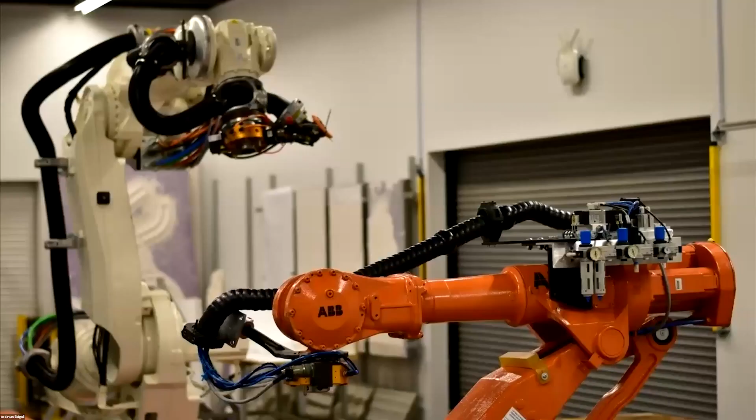Now you can do that, okay. I think you can just have a basic look. As you can see, it's going to do the pick and start cutting. So first cut.

Here is the problem. The second cut is kind of a problem, and it's the edges cut from both sides, and like with the last one, it actually goes from up to down rather than down to up.

Okay, so which one was the problem? Okay, so the last cut is that just the cut it off. So the problem is here.

Let me show you. Okay, this one, it's actually from this point, cutting this side. But actually, I think instead of cutting this face, the surface is just cutting through the middle, and it's this one, this arrow.

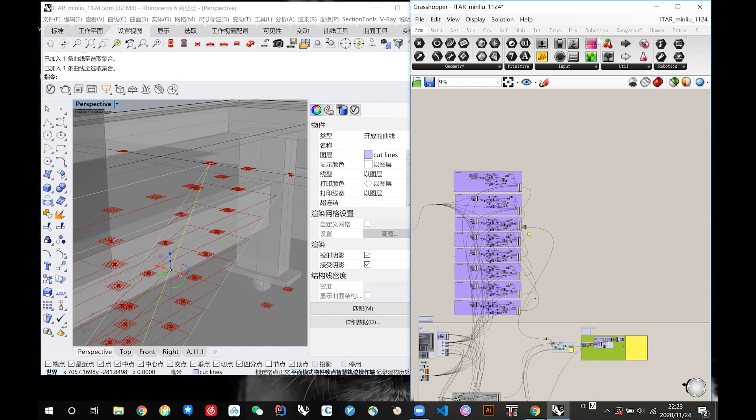Okay, I think so, there's some issue. Wait a second, I need to clarify which side is cutting. Are you talking about cutting this section that I'm drawing right now?

I'll do it second, it shows up. Do you see it? Yes. Okay, interesting, because it doesn't show it on my computer. Oh really? But I can see it. Okay, good.

So it's that side. Okay, I think it's more clear now. Can you see the green part? Yes. Okay, so what was the problem there? Why isn't it cutting it?

No, it's cutting from the middle. Actually, instead of starting from here, it's starting from here. You mean this? No, no.

Remember this surface, and as you can see, it's cutting from this. My suggestion is this: actually just minimize your Grasshopper and then open two views of Rhino so I can see both of them at the same time.

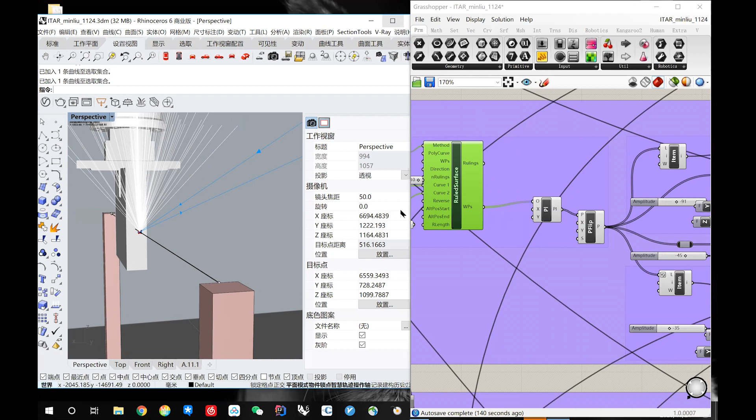Okay, as you can see, it's actually should be cutting this surface, this one. But instead, this kind of surface has some kind of angles, and it's just cutting immediately from the middle, as you can see.

Okay, I think it's just the rotation. So basically you mean that it should be rotated like 90 degrees or something like that? Yeah, as you like. I think it should be some 90 degree.

Can you zoom in on the targets? Wait, I think I can. Yep, there. Because it's Grasshopper, you can. Okay, good, there.

A little bit further. Okay, so do you see what's happening here? Just click somewhere else. Click somewhere else, because, uh-huh, first of all, you have duplicated targets. Why do you have two targets at the same time here?

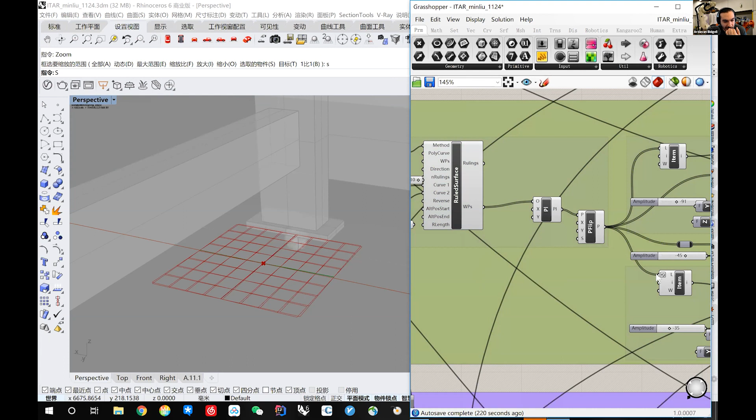Because these two targets are not aligned, because I'm trying to do the rotating. So hide the things that you don't need, so we can actually visualize which parts are the actual targets that you are cutting, this one. Okay, so whatever you don't need, just hide it.

Okay, I already hid it, so there is only one target. Okay, so right now you see that this is the X, this is the Y, and the Z is actually facing down. Yeah, that's not good.

So something is fishy here. Can you zoom out so I can see the targets on its left? Just a little bit, zoom out. Oh, not that much, I'm sorry. So this one?

Actually, yeah, good. So here you see that these targets on this side, this is X, this is Y. And if you use the right-hand rule, Z is up here.

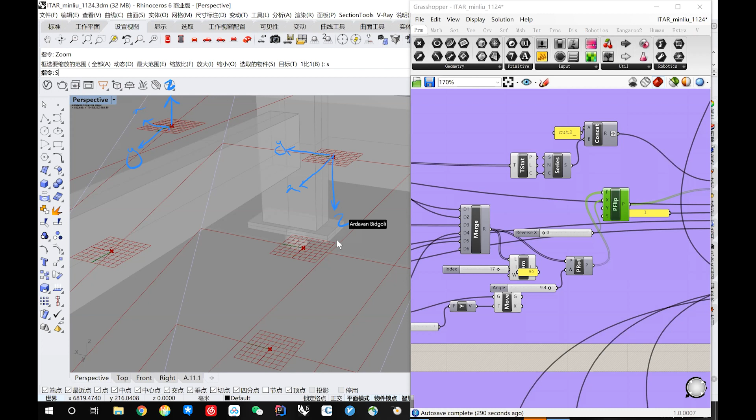Okay, but here you see that Z is here, X, Y, actually X is here, Y is here, and Z is here. So you can see that your targets are actually not only upside down, but they are also 90 degrees rotated. That's why your robot is doing the wrong job. You need to flip these targets.

Yeah, I flip it. Okay, so the flipped one is right now hidden, so we see something else. So actually you should unhide, preview that one, and hide everything before it, so I can make sure everything is correct.

Think... okay. Oops, yeah this one. Okay now let's see what do we have. So we still have two things here. I think there's one better solution.

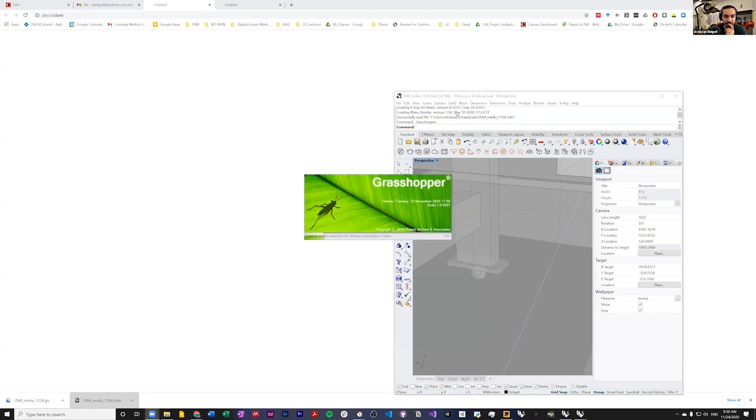Okay, so these are the targets. And I can safely assume that this is the place that you are working on.

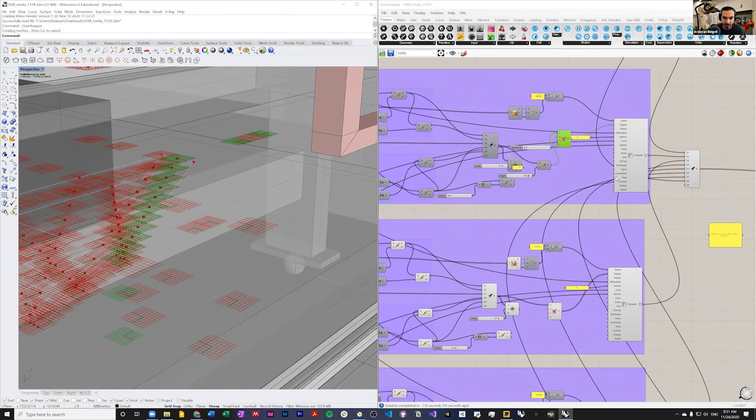So let's see what else do we have over there. So you see that there are two sets of targets here and they're all rotated on top of each other. So there might be some other files.

Okay, so this is the one that you use as your target. And this is, let me see - okay, so this is X, this is Y, and this is Z. It seems this one is legit, no problem.

So let's see what else do we have here. We have a bunch of targets here. I want to compare them together and see what's your tool definition. So here, if you have no problem with these cuts, probably you should not have any problem with these ones either, because they are only a 180-degree rotation of each other.

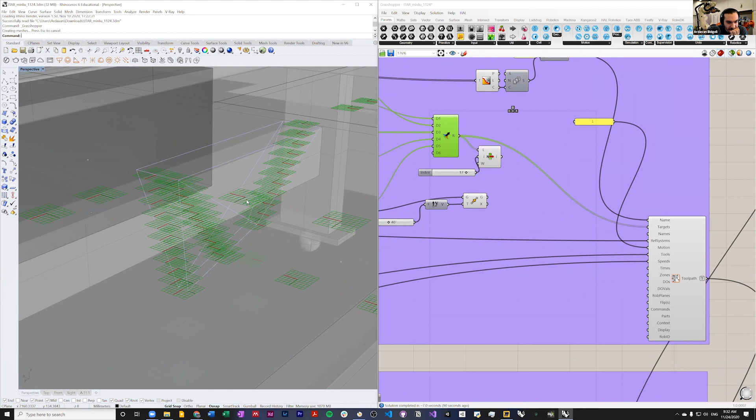And then let's see what else do you have here - all the targets here. Okay, so you have a bunch of targets that are each in different situations. Yet they are all in good shape, and for some reason...

Okay, so let's see what's wrong here. I'm going to play with these two cards here, this one and this one. So let's detach them from this group.

So we can play with these two. Let's see which part of this whole toolpath is the problem you have. I think it was one, am I correct? Let's see. I'm going to keep this perspective view as well as this side view, and see what's going on here and what's going on here.

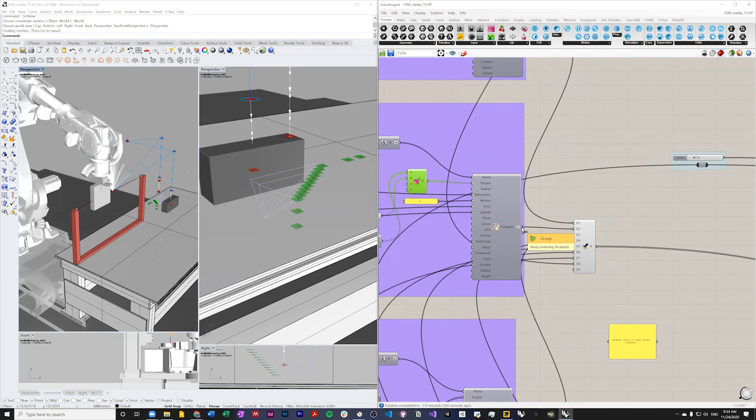I'm going to hide everything else that we don't need here. The only one that we need is this one. Let's assume that this is a toolpath that we need to work with, and the number of targets we have is not 120, so let's keep it around 25 so we can easily manage everything.

Now let's see what does this robot do? The robot is basically turning everything 90-degree rotated, while we have these targets that should not be like this. Now let's check with some other toolpaths that you may have here, like this one.

Okay, let's see what will happen with these ones. Strategically located there. Huh, doesn't work with that one. Oh sorry, my bad, it should actually be like this.

So for this one we have the same issue, it's also cutting this from this side. So this is also... oh, but for this one, got it.

So I think this is the same cut, am I correct? Do you want to cut these steps that you see in green in the same way that you cut those other ones, or not?

Yes, the same way. So if you have any problem with that one, this one is also challenging. First of all, is this a geometry, or is it just like, okay, this is the surface that you're trying to cut.

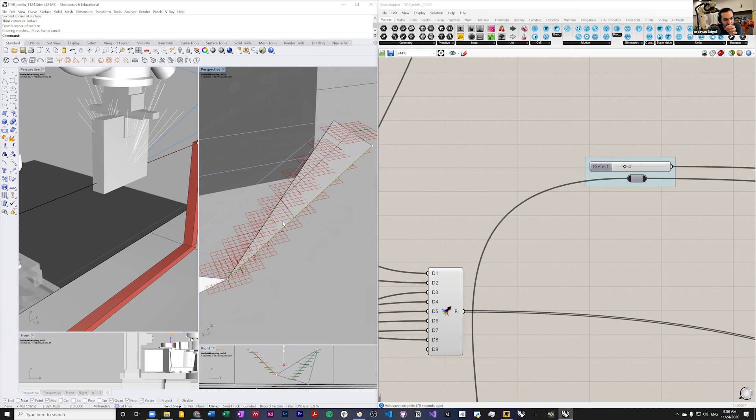For this one, you need to have a different angle, which is perpendicular to the whole thing. I think the only thing you need to do is to actually rotate your targets around its plane. So have you rotated anything?

Yes, this is the one that you need to rotate, and you're not using degrees. That's one of the problems. And keep this one as 90 and minus 90 as the limits.

And maybe it should be the correct number. And then you rotate it for 90. And that's it.

Now when you cut, you see that it's doing the cut that you want. You just need to do the same thing for the rest of it. Is that clear? So the only thing you needed to do is to actually rotate it for a correct amount.

So I'm going to delete whatever you don't need here. Yeah, that was the problem.

And remember, this rotation value must be an angle in degrees, not radians. By default it's radians, so a 90-degree rotation in radians is pi divided by 2, which is going to be a really crazy number, 3.1415 something divided by 2. But if you convert that into angle degrees, then it's going to be an integer number, 90.

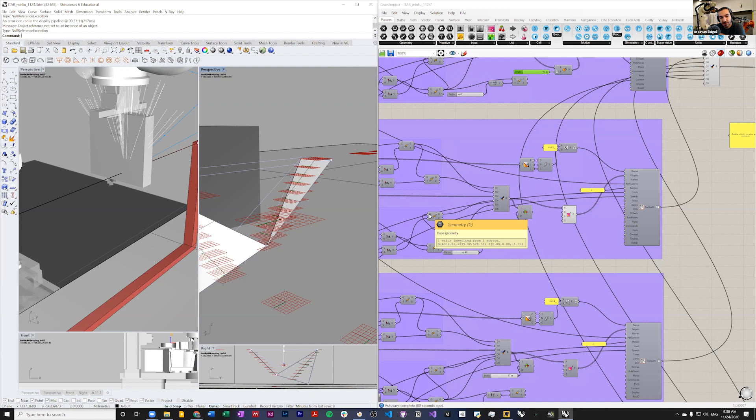The other thing you can actually work on to clarify this whole workflow for yourself is to let the robot hold the actual geometry instead of this block here. So where did you define your work object tool?

Let me see, in the beginning you can just zoom smaller for the grasshopper. Is this no? I actually want the one where you have the work frame. Okay, so wait a second.

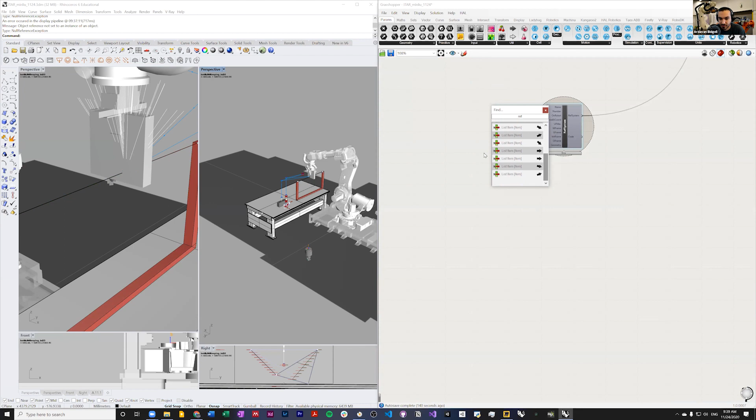Oh, is it here? It's on the... is this one?

My suggestion is to actually, instead of just using that geometry or form, do you have the original geometry of this one somewhere in your file? Where's that, in the layer? I think you should turn off the layers, and in layers, cut elements.

Oh yeah, it's here. Okay, so I'm going to do some extra stuff here. I'm going to bake this one. Oh, I don't need that part. Yeah, I need that part. And then I'm going to scale this thing from here to somewhere maybe here, and then group it.

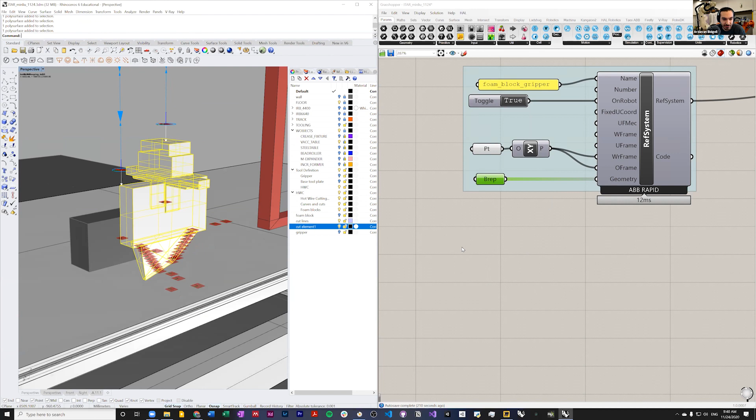Is this everything? Yes. So this is so smart, you can actually see what's going on here. So I'm going to hide whatever we have here. Good, we don't need these things for a sec.

Okay, now your robot is holding the object that you are cutting. So my suggestion is for now, just observe and make sure it's cutting the pieces you're looking for. Whenever your system isn't zooming on the object you want, just select something in the scene and select zoom extend, zoom selected. It's going to show you everything.

Now let's go back and check all of your targets. So not here, but actually somewhere closer to down here. So I think this is all you got, like toolpath merger.

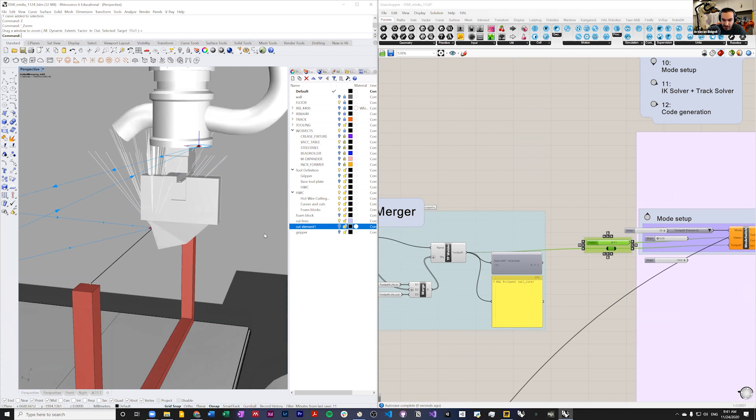Okay, so let's see if it's doing the job correctly. I'm going to just close this because we don't need this. Okay, so let's go for the first cut. Yep, so let's start from scratch. It's coming here, cutting the right thing, moves in the correct direction, no problem.

And then it goes up. I'm going to increase this number into something meaningfully larger, let's go for 50. And again it goes down. Oops, what was that? It's cutting the same thing again.

Okay, so is this the correct one? Yes. No. Is this? No. Something is fishy here, the angle is not correct. I think that's the problem with that rotation.

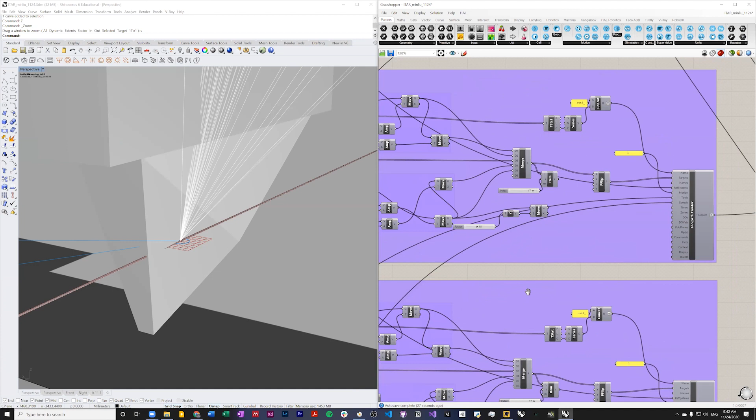So did you use the rotation here again? No, actually I only use rotation. That's a little bit odd. So it's target number 42, let's see 42. Where is that 42? So this is the order. I think it's in number 3 here somewhere.

Okay, that's odd, it shouldn't be, because it's basically just a little bit of error in the rotation thing. Maybe the way you define the surface and the curves is not accurate. Look at here, all the stuff that we have here. Yeah, these two curves.

Okay, I think there might be something wrong here. Oops, that was too much. Okay, I think you need to check that one and see what's wrong here. Something is inaccurate.

Because I see you're following the geometry, maybe when you define these points in your curve, they were not exactly matching the target you were defining. I saw a little bit of discrepancy between the geometry you have and the snaps. That might be it, but we need to double check. Anyway, it seems like the direction of the cut is correct, but it needs a little more investigation to see why it's not exactly matching the orientation.

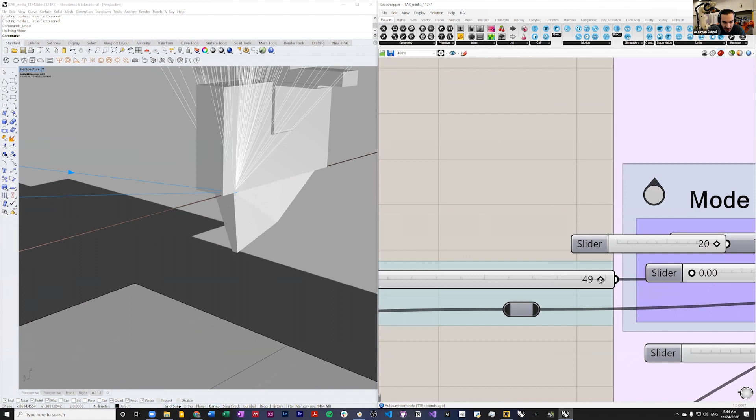Okay, do you see this? This is also a little bit challenging. So let's go for target from 50 to 100. The reason I'm making these 50-step increments is because I want to have complete control over everything. Okay, so actually it's kind of 135 total. Okay, so it's doing something I'm not sure about here.

This one is definitely not the one you want to cut. Maybe you somehow duplicated something. Okay, this one seems legit. Is it cutting? Yes, you see that it's accurate. So you see half of this wire here in the file, the other one was slightly off center.

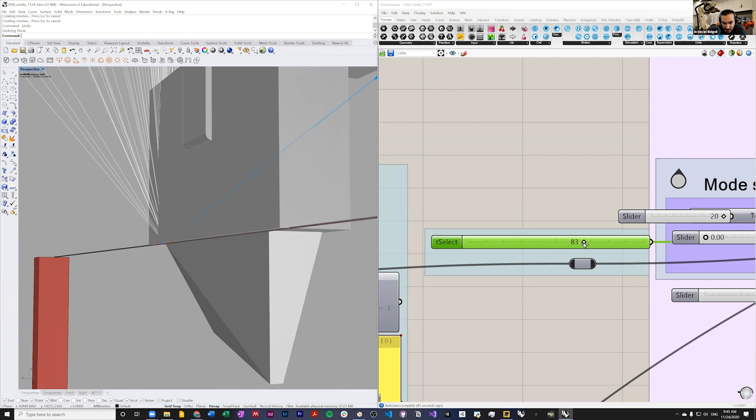Okay, and then somehow everything is getting cut twice, and some of them are not accurate. Okay, this one is also correct. Let's go between 100 and 150.

I hate this sound when Grasshopper makes it. Okay, this is correct. And let's see, oh, that one is a little bit challenging.

So do you see this one? The robot is here, then it goes there. This means that from point A, is it drawing? Yes, from point A to point B it's going to actually cut through your model. So you need to increase the Z value, okay?

Okay, so let's see, between 111, which is basically your object is here, and 112, your object gets there.

You see what happens? Your object is actually going to go through this wire, and then half of it is going to be cut. I can safely assume the robot is going to go full speed from this point to that point, so everything is going to be a little bit challenging. My suggestion is to increase those safety spaces as much as you can.

So this is another cut, which is basically your final cut. Then your object is going to drop down. Okay, one piece of advice.

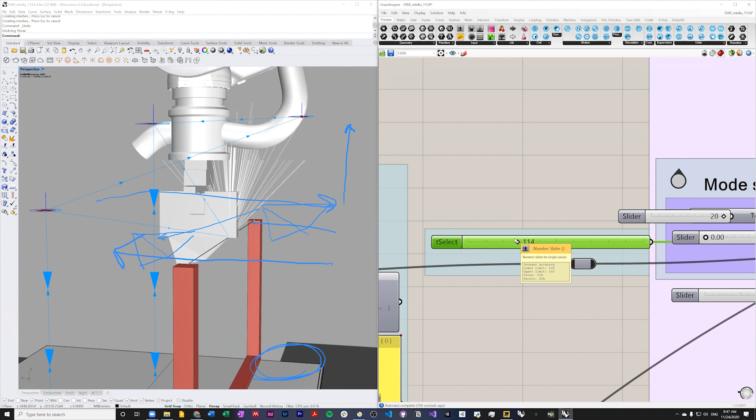Instead of, for the last cut, going from left to right, you see the robot goes from left to right. It means at the end it's going to drop your object between the table and the robot. But if you go from right to left instead, your object is going to drop here, so somebody can actually stand on the other side and just grab it while it's falling down.

But I think it's not a good idea to have somebody on this side between the table and the robot. So for the last motion, just flip the target, reverse the order of targets. That way you're going to get rid of that Z value that goes through your object, and also you're going to have a clean cut. Your object is going to drop somewhere that you can actually pick up.

Okay, go ahead, any question? Yeah, just you mean for the last pass, just reverse it on the other side, so it's kind of going to be fine.

So where is the last one? Is it the last one? Probably, it's on top, cut 8, I remember. This one? Cut 8, okay. Yeah, so top left.

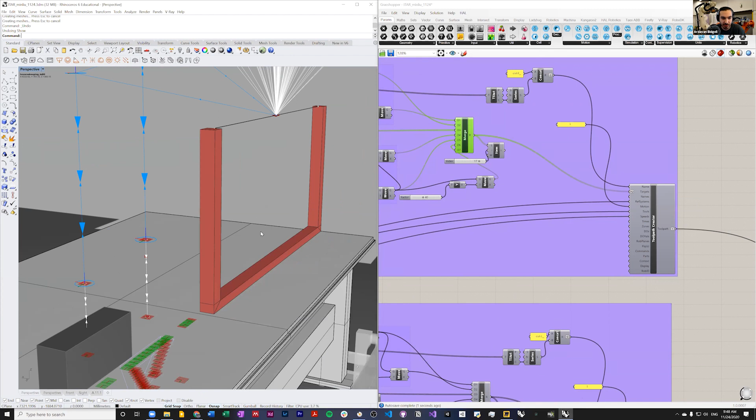Yeah, so basically you need to come here and reverse this one. And let's see what's going on over there. Okay.

What happened? Yep, so basically these are the last cuts. So it does the last cut, okay, here. It does the last cut, goes here, and then comes back, and then it drops the object somewhere, probably here, and you can pick it up.

And I see that you haven't updated the location of this hot wire cutter, because in reality the hot wire cutter is not there, it's here. You need to measure the TCP here and update your code to reflect the exact location of the robot.

And if that's the case, then I think these two points here, the pickup and place, should also be slightly different from here. So right now I think your robot is picking up everything from here, but I think in reality it should be slightly further down the road here.

Or if you want to make it easier for your friends to put these objects in the correct place, it might be better to have it somewhere here with all those brackets that I mentioned the other time. Yeah, you need to update these data in your file and make sure they accurately represent the space in the lab. Oh, and another question is about the kind of inaccuracy, because I remember one cut is...

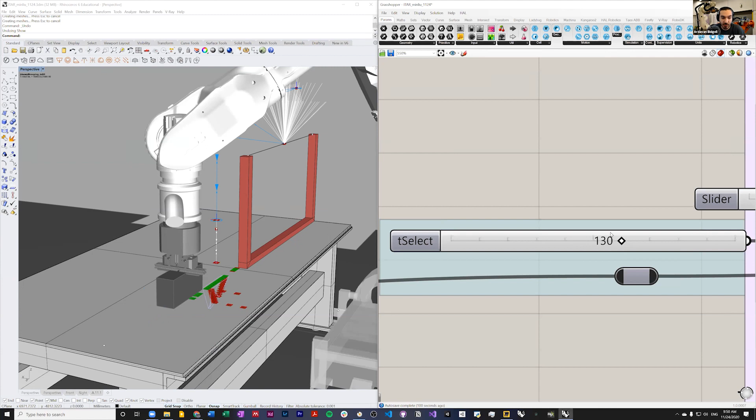What was that again? Oh, the one cut was problematic. So let's see which cut was that one. First of all, I think there were some duplicated cuts. You need to take care of that part. That's also really important, so let's have a look.

Okay, here, one cut, two cuts, which I basically think were the same thing. Let's see. Do you have two cuts here? So one cut here, okay, let's start from scratch.

This is the first cut, that's fine, we cut it once. We cut it twice, you see that? Okay, so we cut this part twice, so somehow in your code you should take care of this part. And both of them seem to be accurate. Yes, no problem.

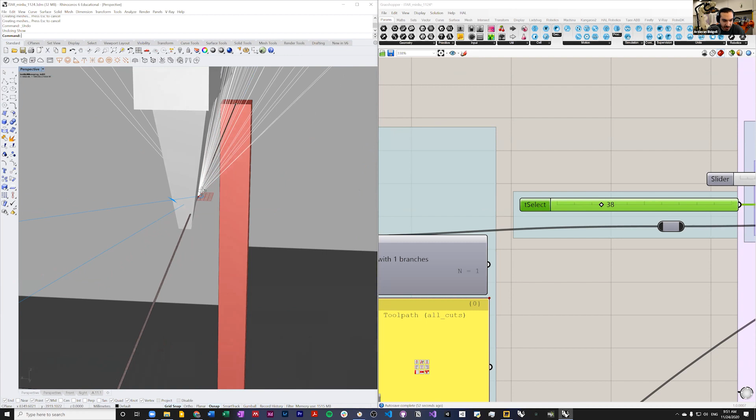And then let's see what will happen in your third cut. Okay, the third cut is not accurate. Somehow it's not exactly representing the geometry that you were working on.

Yeah, it's in the fourth cut, and then the fourth cut is exactly the same thing, so third and fourth are basically the same thing. I think somewhere here also you have that problem with going through the wire, see that? Yeah, I see. Okay. This cut is fine.

This is cutting that same thing again. Okay, I need to double check your file, and then it is inaccurate. This is fine, and this is fine. Somewhere in your code, you duplicated some of these cuts.

Maybe I don't know. Oh, actually, do you remember when I mentioned your cuts, I said some of them can be seen there twice. So these are all your toolpaths. So you have this one.

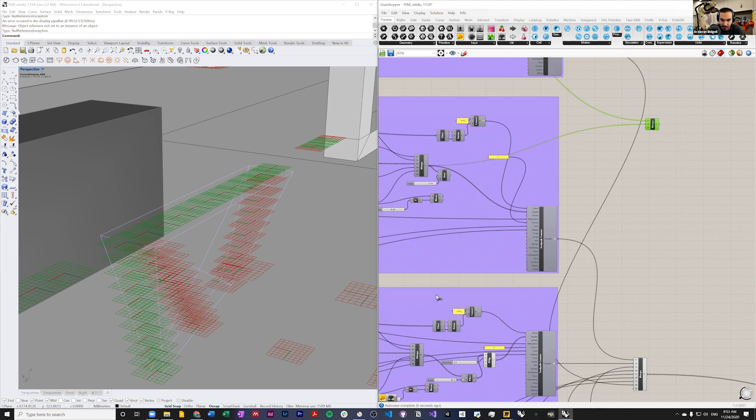Okay, so first of all, keep your files a little bit. Okay, so just like, so these ones, these ones. Okay, how many of them do you have? 15. That makes sense. And here, how many did you have? Another 15. Another 15 here.

Okay, wait a second. So here we have these, and let me hide everything else. We have these targets. Okay, these are fine. Seems to be fine. Okay, these are fine. And in all cases, we have only 15.

Okay, what was this one? Did you have this? Okay, no, that's new. And then we have everything from here, here. Okay, so it seems that your cuts are not duplicated here, but somewhere else they are all duplicated.

Okay, so you have 8 cuts. Yeah. So there's something called toolpath decompose or data extractor. Okay, so let's see, how many targets do you have? Okay, so you have 8 paths with 16 targets.

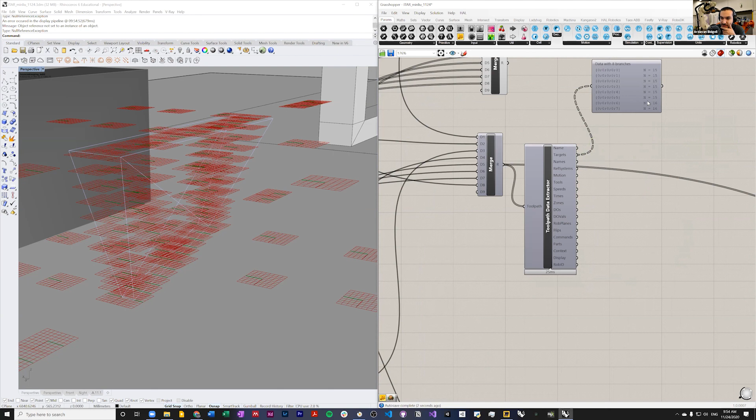So I'm fine with that. This is not a problem. Seems like this part is correct. And then you join them here. So you have 8, 15, so it's going to be 120. Okay, this is also, I think I know what's going on. Okay, this is still fine.

Wait, how come that happens? Maybe they are not repeating. Maybe the arm is rotating, so it's cutting the other side.

So let's count and see how many cuts you should have. So you should have how many sets of cuts? So you should have 1 here, 2, 3, 4, 5, 6, and 7. Why do you have 8? I think I should have 8, because like 1, 2, 3, 4, 5, 6, 7, 8. Like each side of the block has 2 cuts.

Why? So basically, let's see. What do I see here? So there's 1 here. And we have the second one here. So it's 2. I think you missed 4, 5. Yes, you're right. 7, 8.

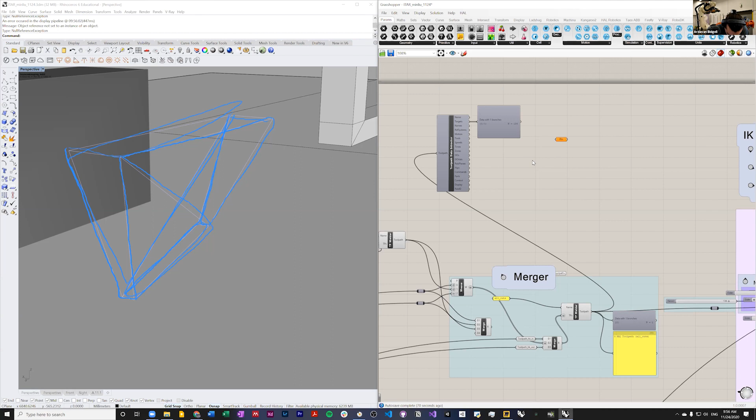Yes, you're right. But how come we have those extra steps that are not exactly in your geometry? Mm-hmm. Oh, so this one is actually on this surface. We have 2, which I couldn't see.

Okay, so one of them should be this one. So let's see, like in the first pass, it was 1. It was 2. These 2 are actually the same. Yeah, I'm pretty sure. Why is it happening?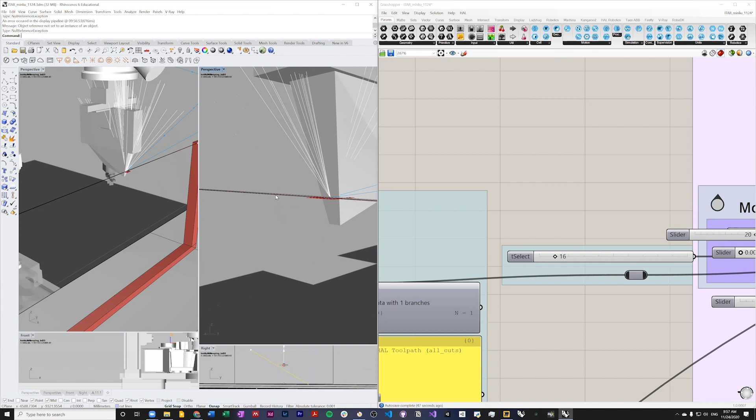So let's see. Do we have 2 surfaces on this side? Like, am I making a mistake about it? I think maybe in the first cut, maybe I merged them twice. I don't know. I think I can just double check. I think it's not. Oh, maybe something here.

Let me just check. So where's the first one? The first one is actually here. Can you repeat it? Can we see it moving again? Sure. I remember there was a way to make it easier. So it's moving ahead and then moving ahead again.

So let's check that. Let's check your targets. I think maybe when you were defining your targets, you merged them too much. I think it's what I was saying, because as you can see, when it's cut the first time, the direction is on one side, and when the direction of the cut of the 2 pieces is on one side. So you think the targets are rotating, you mean? Yeah, maybe the arm is rotating, so it's cutting the other side, but it seems like it's rotating, but it's not.

Oh, so you mean the target is actually rotating? Okay, so let me just put them on one side. I'm sorry. You're right. You're right, because here we have this extra triangle, but on the other side we don't have it. Yes, exactly. This is correct.

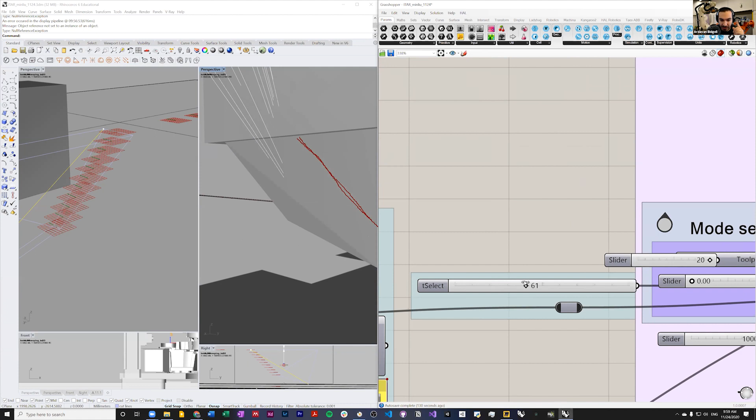You're right. Okay, so it seems that the file is correct. It was my bad. Okay, so I think you're in good shape regarding this one. So the only part that you needed to change was that 90-degree rotation, and everything is going to be fine. That was a bit challenging, but thank you, Emilio, for spotting that.

Maybe one solution to go ahead, like the inaccuracy cuts. Do we solve it? You should actually solve that one also. Let's see what was the possible reason for that one. So I'm going to unhide everything, and then I'm going to immediately regret that decision.

Where was that thing? It was in the layer. Cut side 1.1, I think. Is it this one? So this is the object. Okay, and let's see if your targets are actually completely matching.

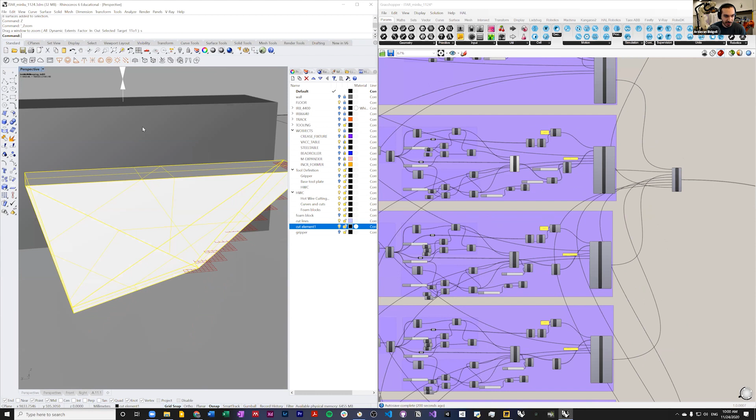Okay, so briefly I'm going to also hide whatever we have here. What is this object? Is it blocked or something? Okay, so let's see which target was the one that we were looking for. So let's go for ghosted possibly, or maybe X-ray.

Okay, so we want to see, I think, the target that we were missing. Let's see. These are fine. Okay, these targets are also pretty fine, no problem. And this is the top guy.

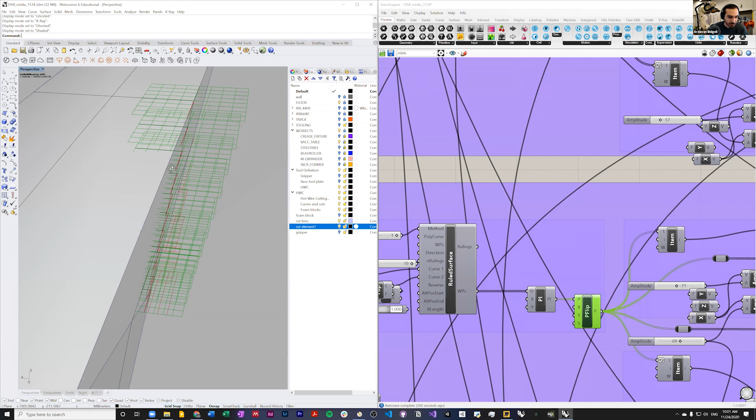Okay, this is the one that might be a little bit challenging. So let's have a look on the robot and see which one. Okay, so this one is the one that we have problem with. Compare it, this one and this one, I think it's on the other side. Yes, so basically the one that I'm right now looking for is this part. Am I correct? Mm-hmm. Yeah.

Okay, and the same thing that I see here. So somehow, oh no, not that one. Let me hide those that I don't need. Definitely next time make your file a little bit cleaner, so we can spot everything on time. Not this one. Probably this one. Okay.

So let's see why these things are not exactly matching the target that we are looking for. Okay, so here it is. These are the targets. Let's track them down from scratch. Like, what are the curves?

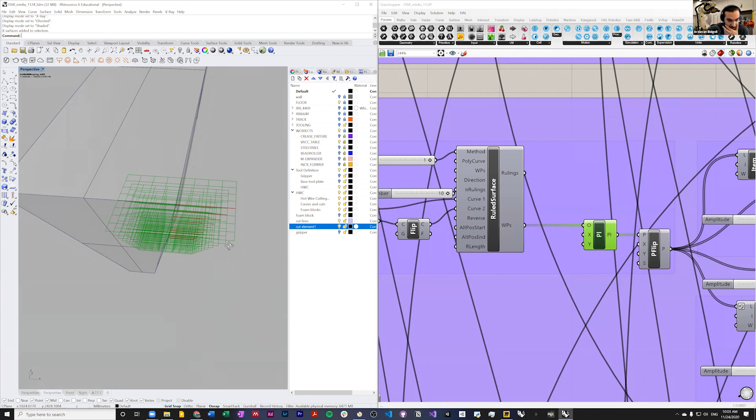So curves are actually pretty nicely arranged here, and you have a really cramped thing here, and you're actually not using them. So why not just delete them? Oh, no, my bad, with these curves. So these are the planes that this grasshopper thing generates. Okay, so these are the points.

I'm going to do a trick here that might not be the most intuitive one. This is the surface that I have here. I'm just going to quickly make a hack to just double check everything. So this is the surface that I have.

I'm going to introduce it to grasshopper. Okay, this is the surface, these are the points, and I'm going to evaluate those points on this surface. This is the surface, these are the UVs, and I want to see the normal. So these are this one, and these are the vectors.

So it's the point, this is the vector, and it's the size. 100 is too much, but oh no, not that one. Okay. Or maybe a better way is to just basically use SDL - start, direction, and then use this one as SDL.

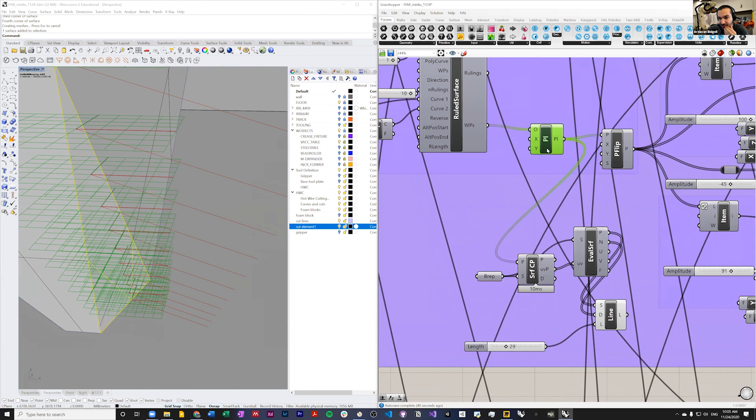Okay, so I have these ones, and okay, so these are the SDLs. Okay, you can see that they are not exactly matching the direction of this plane. You see that? Yeah, I saw that. See, the reason is that we are using just a basic XY plane. You see that? And then you just rotated that one. Okay, so this is not going to work.

The reason is that these curves are actually not exactly aligned with XYZ. So you should actually come up with a solution to rotate these planes, to rotate these planes in the correct value. Let's see what we can do. So...

And not this one. Actually, give me a second. We may actually use C here. Did I make a mistake about it? Yeah. Okay, now they are aligned in that direction. Let me just figure out what would be a possible solution for this one.

Because, okay, these ruling lines, okay, so we want to have them like this. So these are going to be X, and that one is going to be Y. My bad here. Okay, so we have all these planes that are actually aligned. Yeah, the first one was correct. Let me just clean up the space here.

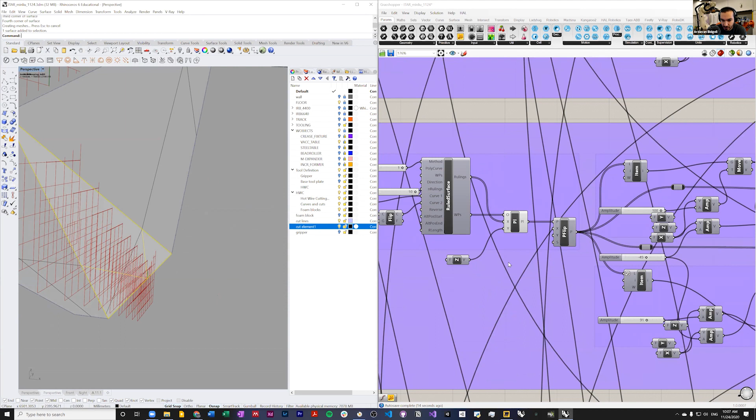So we have all these planes that are matching our orientation of the surface. What we need to do here is to actually bring them up from this position and rotate them to get like this. So we don't need to flip them around X. I'm just going to move everything a little bit further.

Ooh, that's super crowded. Okay, one suggestion to make everything a little bit cleaner: double click on this wire, connect this one, remove this, and set wire display to hidden. Same for the speed - I'm putting everything in this speed placeholder, connecting it here, and I don't need this one anymore. Wire display into hidden, so I'm not going to see those lines moving through the others. You can still see it if you click on it, but it makes everything way cleaner.

Okay, so we have these. We don't need the flip. We need actually to rotate these targets around an axis in their own plane. Where is that? Okay, so this is the one. And we want to rotate these planes around these axes for 90 degrees, or possibly minus 90 degrees. And again, it should be in degrees.

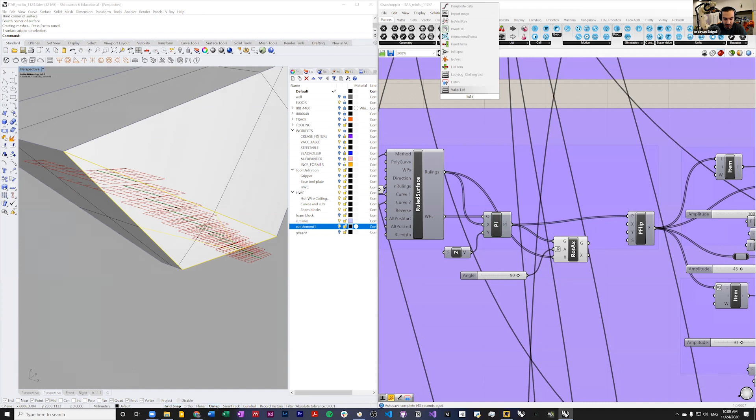Basically, let's see if it's the first or the last item. Okay, so it is the first item that's actually null. So it's the first item that's missing. So we just need to move the first item to the second item to get there. Do you get what's happening here?

So basically, physically speaking, geometrically speaking, HAL is trying to connect this point to this point and make a line, and this point and this point to make a line. But when it comes here, because these two lines are sharing the beginning point with each other, Grasshopper cannot make a line between one point. It needs to have two points, even slightly closer to each other. But here we only have one point, and between one point you cannot draw a line - you should always have two. So somehow this one failed to make a target, so instead of giving you a target, it's giving you a null. You see that the first item is marked as null. That's the reason that you have this one here.

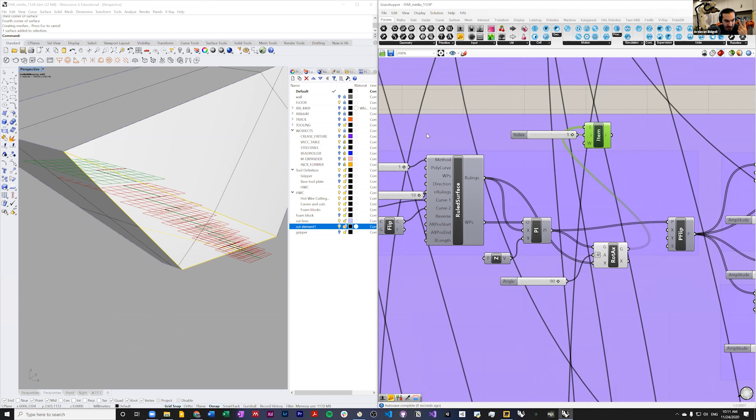So you need to somehow compensate for that one. My suggestion is to just basically grab this one and move it here. In order to do so, I'm just going to grab one of the targets, for example target index 2 or index 1, which is the second item, which is not null - you see it? It's here. And just move it to this point. How can I move it? I can use different methods, to be honest.

One way to do this is to actually - let's see if it gives me - okay, so I'm going to make a vector from 2 points. Basically I'm going to grab this item here and move it from this point, or basically copy it from this point to this point. I know that these 2 points are items 0 and 1 in the list of these targets, so I know these are the two points I need. So item number 0 - I need to have it a little bit better - item 0 is my target, and item number 1 is the one I want to start from.

And I'm going to say start from here and from here, and I want to move this one. This is the object I want to move. This is the vector I want to move across. So, okay, now I have it.

And I need to merge these things together to make sure that I have the correct order. Or actually, to be more specific, I'm going to replace the item, because in this list of targets, item number 0, or index 0, is the one that I don't want to have anymore because it's a null, and I want to replace it. Put this one here, but before that, make sure the data structure is the same. So I'm just going to check the data structure - 0,0 item 0, 0,0 item 0. Now replaced with that one, everything seems cool.

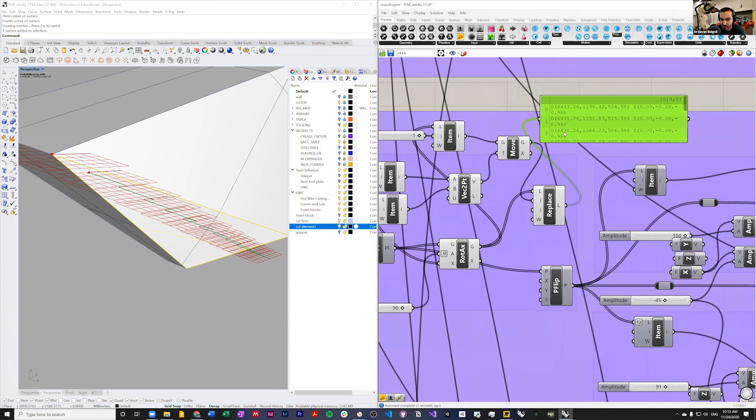And we don't need those things anymore. So you have the flipping thing here. I'm not sure if you need the flip one, but let's try it. Let's see if it's right now working. If the robot is completely upside down - nope, it's actually pretty nice and neat. But why is it cutting through this curve? Okay, so let's see.

So it's right now cutting something. I'm not sure if it's the case, so let's see. Okay, it's cutting this, but we are looking for something else. So these two, oh, the part that we were looking for, which way is that?

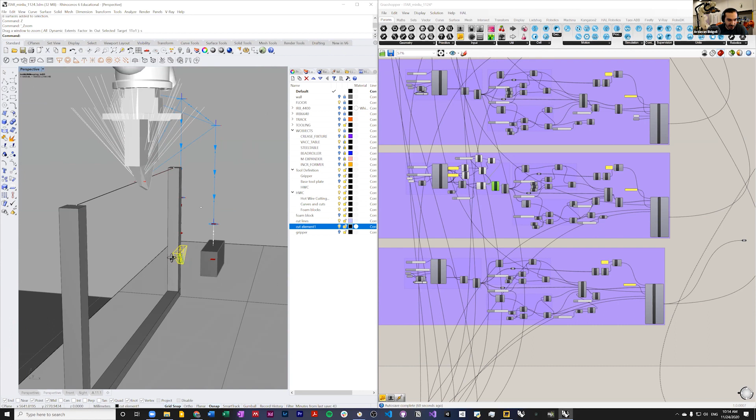Okay, so we are cutting this small triangle here. Let's see where we can get to that small triangle. Okay, let's go and check all the cuts. Where is the time for that small triangle?

Was it here? No. Is it here? Yes. Nope. Not here. Somebody help me with finding that. Okay, not here. So when did we cut this small triangle? Not here. Not here. Do you remember where that was?

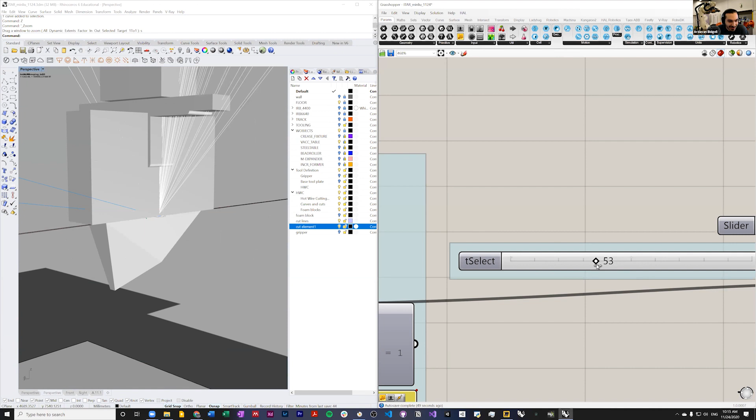I think it was like in the third cut. In the third cut? But this is the small triangle. But I never saw that being cut. Is this the one? No, it's cutting the other one, this big one. And this is the bottom part. This is the last cut. It's not there. Okay, so let's see.

Where was the place we were working on? Here. And from what I saw, I think it's the third one. So let's see, we have 1, 2, 3, 4, 5. It should be somewhere in the 5th one. Am I correct? Because in this order, it's the 6th one, which is this number 1 is the, okay, so let's see. It should be around towards the end.

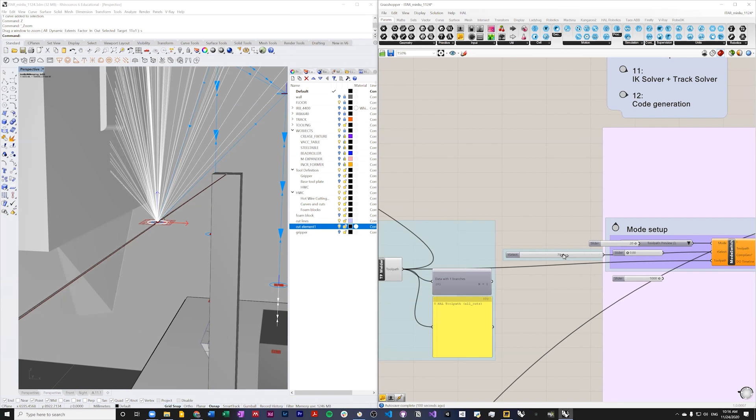Okay, if you see number 6, the line isn't shaded. Maybe it's disconnected. Okay, let's see, number 6, you mean here? On the merge? Yes, you mean? Oh okay, so there's a delay. So maybe you're talking about this.

You mean this? Maybe take out the green. If you see number 6, the line is a different tone. Right now, here, you mean? Yes, in that one, in the merge. Oh no, it's okay. Yeah, because at that time I was clicking on it, that's why it had maybe a different color. I was thinking it was like the connector or something.

Okay, so there's an easy way, an easy fix for this whole confusion, and that's called this. Okay, let's see.

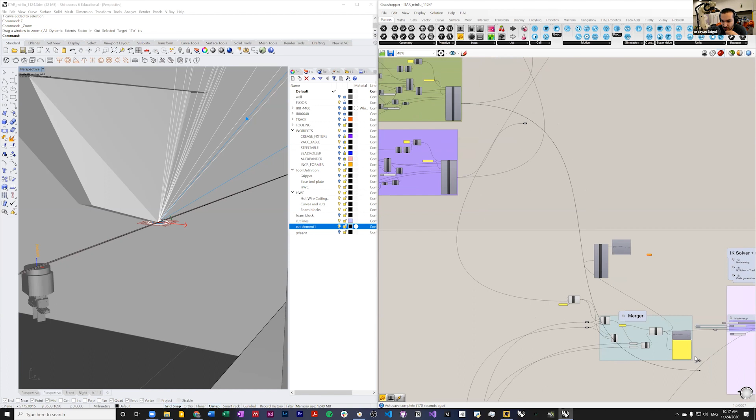Yep, you see that it's upside down because we used that flip. But I think you need to make that 90-degree rotation. That's why. Okay, so first of all, it doesn't need that flip, I guess. So first of all, the 90-degree should probably be -90, to make sure it's not doing anything stupid. Yep, actually it should be 0.

Or is it? So it's trying to cut this piece. Oh, it's rotating around the wrong axis. Why is that the case? Okay, that makes sense. Okay, so it's the wrong axis.

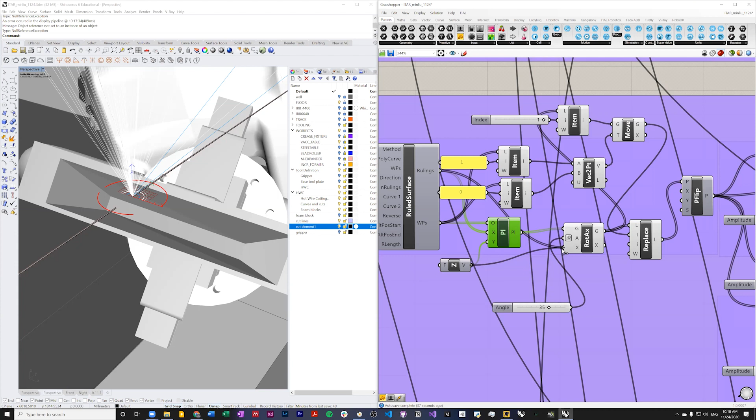So let's see how we can solve this problem. Maybe it should rotate around. Oh no, my bad, my bad. Actually it should be SDL, start direction, and L. It's interesting, in either case it's rotating around the wrong axis. Because it should be something like this, but 35 degrees isn't something meaningful in this environment.

But first we actually need to make sure it's not going upside down. We first need to put it the other way around. And I see that you have so many things connecting to each other here. So let's go here and here and here, and just use this one.

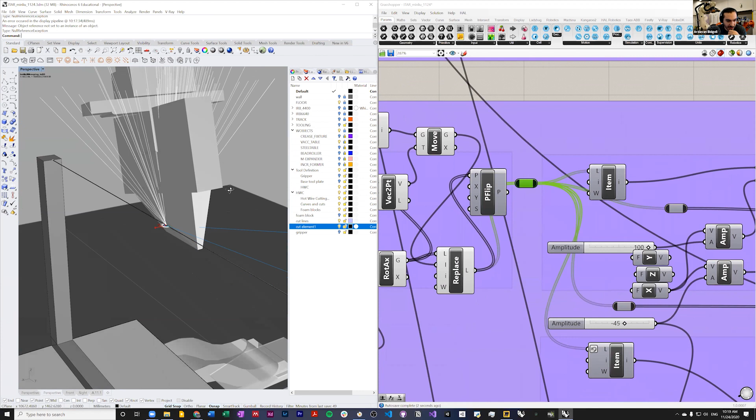So the robot is now in the good, correct direction, and it's doing its job correctly. Do you see that? Now it's completely aligned. And the only thing we need to do—so the rotation was correct, no problem on that side. Now let's see if it's doing the cut correctly. So it was actually cutting that piece. The problem was that we were seeing it from the wrong direction. That's why we had that issue.

So this is the correct cut. You see that? It's exactly cutting your object. And if you look carefully, it's completely okay. I think you need to do the same thing for every single surface you have, to make sure they are doing the right cuts. The reason you saw those slightly different cuts was the fact that you were not compensating for that orientation.

Let's see where else we had the same issue. It took more than what I was expecting to debug every single one of these, but let's see. We still need to cover Machina because you need to do something extra with Machina.

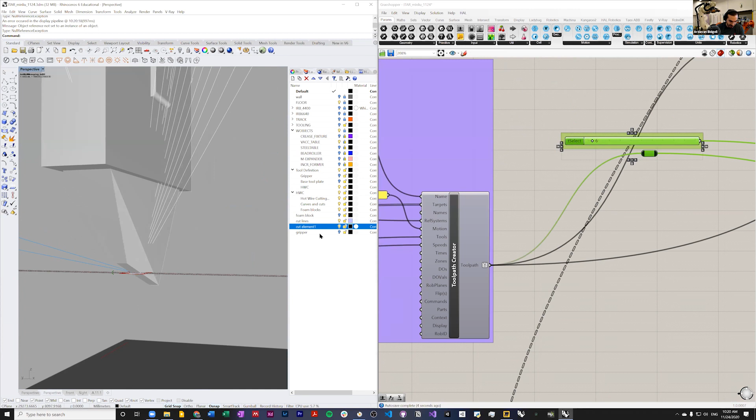Okay, so I think this one is completely flat. Based on your design, this one is completely vertical, so there's no problem with this one. I think this side here is fine, also this side here is fine, and the bottom cut is fine.

The only part that you need to actually do this compensation is this plane here, as well as these two planes in the back. So these four are the ones that you need to basically compensate for that error.

And so basically, if I want to say this one - oh, somehow this thing moves really slowly on my iPad. So basically 1, 2, 3, 4, these four are the ones that you need to compensate for those errors. So let's see, where did you have them?

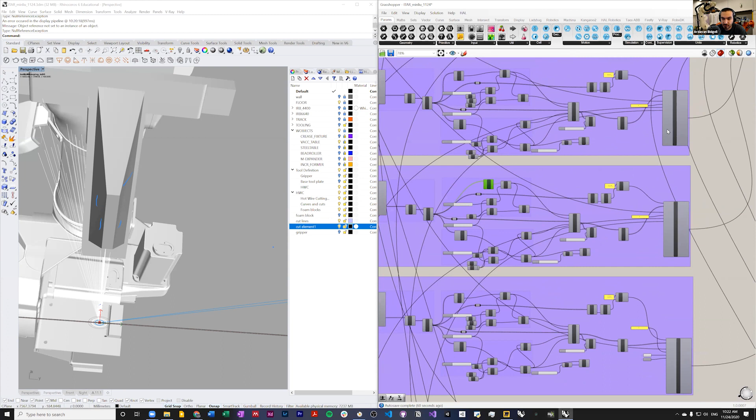So first of all, let's mark the one that I edited. The file should be really, really cleaned. Right now, it is not cleaned that much. Maybe you don't need this, or maybe you need those two to make everything cleaner. Let's see where else did you have that one.

Okay, let's get back here. Yeah, I had the name on the left top. I think you have names here? Yeah, it's side 1.1, side 1.2. Oh, side okay, 2, great.

These are the four planes that maybe need compensation, and I think you were in them. So you need to do two things. First, you need to make sure that they're all aligned, like the same method that I used here.

Where's that? Where did I do that? Here. Wow. First of all, let's make everything a little bit cleaner here for you by just moving everything from here slightly to the left. And the flip thing is not necessary in this specific case. You may need it later on.

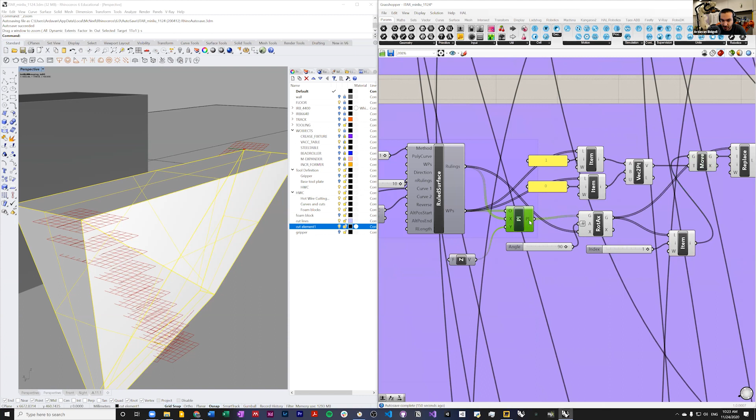But here, the move command, vector 2 points, here and here, just a little bit cleaner. Not the cleanest thing ever, but the only part that you need to actually take care of is to add this XY plane. You need to connect this X to this plane from the ruled surface and add Z as the constant, and make sure that the rotation is correct.

And then you will face the problem of a missing plane over there. That's not that hard to handle. So let's try to do the same thing with this. This one is another surface of interest.

Let me hide whatever we don't need here. Okay, so this is the surface of interest. We need to have these things as x's. Yep, they are matching the surface.

And then you flip them - probably the flip is not necessary. And then you're almost good, you have no problem anymore.

Here, you can even just skip this, but I don't know, you need to double check. And then you need to rotate them around their axis, so another rotate around axis. These planes around this axis, with again, make sure that it is 90 degrees, not 90 radians.

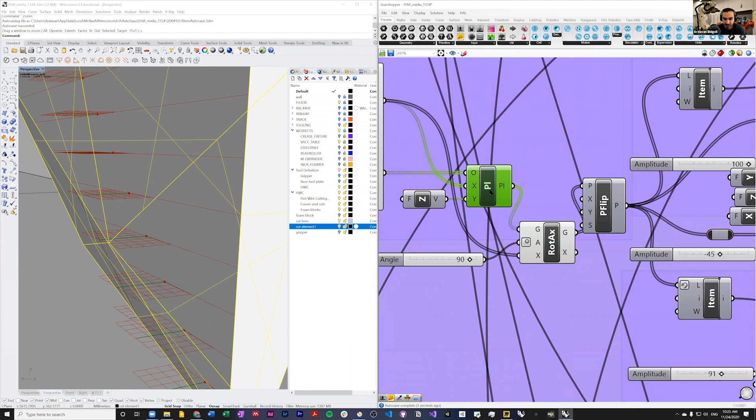Yep, and then probably feed it into flip, but I'm pretty sure that you don't need to flip them in that direction. Also make sure that you're correcting the last point that's missing, which in this case is going to happen in this corner. Yeah, that's it, you just need to correct these things in your file.

So I think we have already covered 1 hour of the class in office hours. Okay, so you're fine with this part? Go ahead. Since we don't have so much time, we can use this same hall and just change the shapes.

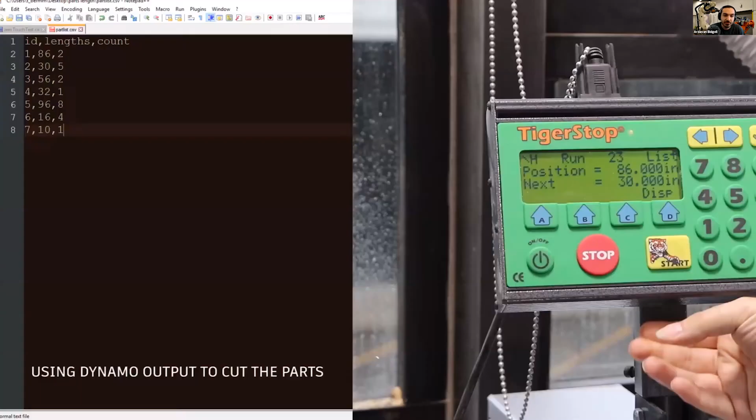A structural fabrication workflow. So basically we had this script that could look at a frame structure in Revit and then produce a data sheet that gives you the exact dimension of each piece of timber structure that you need to have. And then it could send the data to a CNC machine to cut all the elements and details on each of these pieces.

And then it would let you put some marks on each of these details so the robot could actually find them and work with them. So we designed some gripper for these robots, so the robot should actually be able to grab these items from the correct place. But at first it needed to find these elements and figure out what is the orientation of them, and then make a decision about where it should go to grab them.

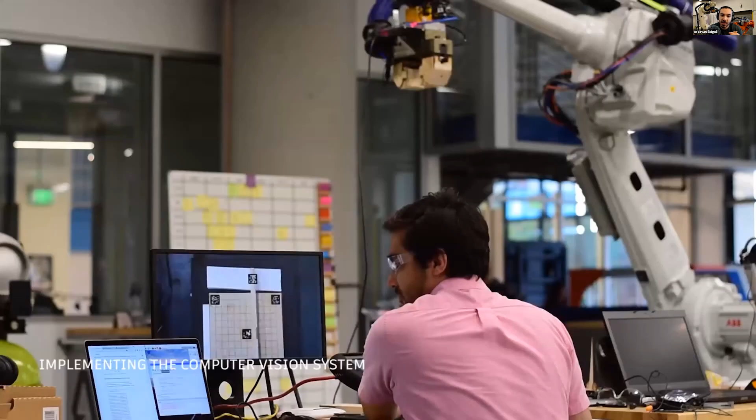So basically these things are called Aruco markers. And when a robot looks at those Aruco markers, the computer vision algorithm can tell what's the distance between the camera and these Aruco markers, because it knows the size of them and it knows the patterns on them. So it can actually say that, okay, this is like 2 meters away from me.

And based on the perspective, it can say what is the orientation of that one. So basically, each of these Aruco markers are defining a target object for the robot, and the robot can actually go over there and grab it. And then we designed some details to take care of the 5-millimeter discrepancy that's happening over there.

So Vila is understanding this problem because she's working on some drone robotic fabrication. So she knows exactly what I'm talking about when I say there are discrepancies. So here on the right, you see that I'm using Python on Jupyter Notebook, and this is the feed of the camera. The camera sees that these gray objects are the frame that this piece of wood is installed on.

And these 3 markers, the red one, yellow one, and blue one, are those markers on a piece of wood that we have. I think the robot could only see the blue one and the red one, and it calculates the middle one, which is the place that this gripper should go and grab the object. But everything happens in Python, including how we send the data from Python to the robot to actually go ahead and grab that object.

Machina Bridge is the part that takes care of this computer vision algorithm and robotic control. So this is the project that we've done. We just randomly put these objects on this platform.

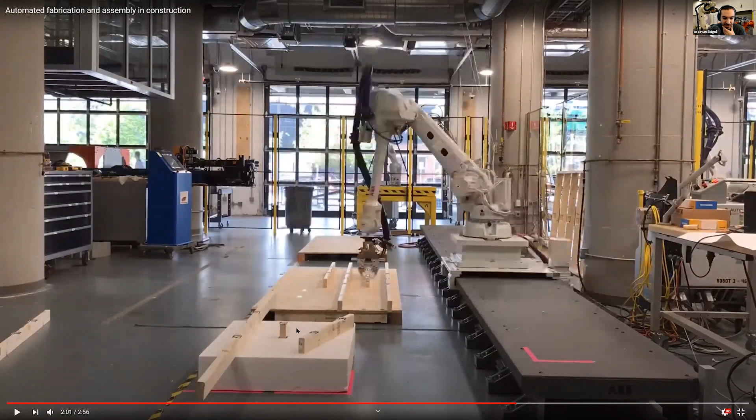As you can see at the middle of the platform, there is actually one marker. This marker at the middle was working as the work object. The robot would look at that one and say, okay, this is the work object that I should define in order to grab all these elements.

Once it was aware of the location of this work object, it could actually locate the other ones in relation with that one, pick them up from random places on this platform, sort them here, and then it would actually put them in the correct order in the fabrication site.

So think about it in this way. There is a truck that brings all these pieces from the factory. The robot needs to sort them and then bring them in the correct order, and then somebody can actually help the robot to fix them in their correct place.

So this was a really accurate project. We were not expecting such level of accuracy, but it was really interesting. You could assemble this whole thing in like half an hour or so if you wanted to do so. But you can see that there are some extra details here to work on.

It was really interesting. But the reason that we could do this whole real-time interaction with the robot was the fact that we were using Machina as the bridge between our computer vision system and this robotic control.

Since we are not going to use the robot anymore after this assignment, we are going to do some virtual working with this workflow. Let's go ahead and do it step by step.

I'm going to close whatever I have here because it's really important to follow exactly the steps I'm taking. As I mentioned, this Machina thing is running a server on your computer, and it needs to communicate with the robot. It's really important to do these steps one by one to make sure that it's doing its job.

If you have opened that file that I gave you, unzip it and open it in a folder, you'll see that there are lots of files here. You're not working with any of them except this one, machinabridge.exe.

Okay, so go ahead on this file, right click and run it as an administrator. When you do this, you will see this window.

So basically it's a Windows app that has this interface, and we are going to start working with it in a moment. But just let me tell you what's going on here. There's this part on the left that defines what is your robot, how are you going to communicate with it, and it's going to tell you if anything else is communicating with this bridge. So bridge is the middleware.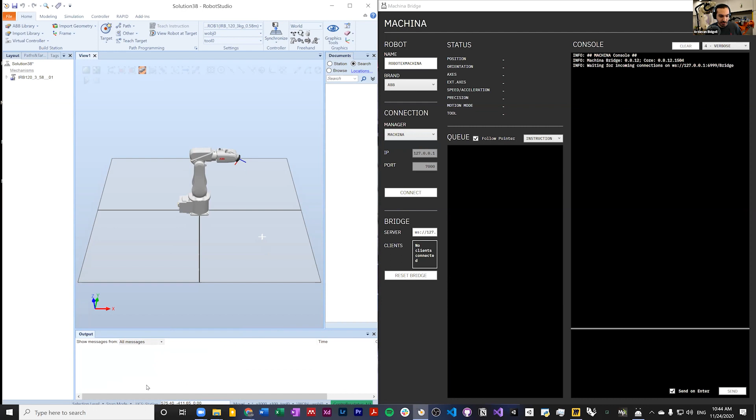But while I'm doing it, keep an eye on what's happening here. Actually, to make it even better for you, I'm going to clear everything here. And just to clarify, I go to Rapid and check what's going on in the Rapid side on this robot.

You see there's nothing in Rapid. So I'm just going to also make a vertical group here so you see what's going on in Rapid, what's going on with the robot, and what's going on in this panel here.

So getting back to Machina, I'm going to connect them together. As soon as I do so, Machina is going to connect with RobotStudio, tries to make its magic. And if everything goes well, and if you have run Machina as an administrator and you don't have a firewall that blocks it, you will see that on the right side, it says, OK, I'm working with this robot.

I'm communicating with it, and I can see what's going on with the robot. It's telling us where is the position of the robot, where is its orientation. It's going to tell us what are the axes connected to this one. It also tells you about the speed, precision, and everything. So basically, you have full information about this robot.

And this robot is right now up and running. And then in the Rapid side, you see that this Machina driver is running on this robot. So basically, when you hit connect, Machina connects to RobotStudio, deletes the Rapid code, installs its own server, and tries to communicate with it.

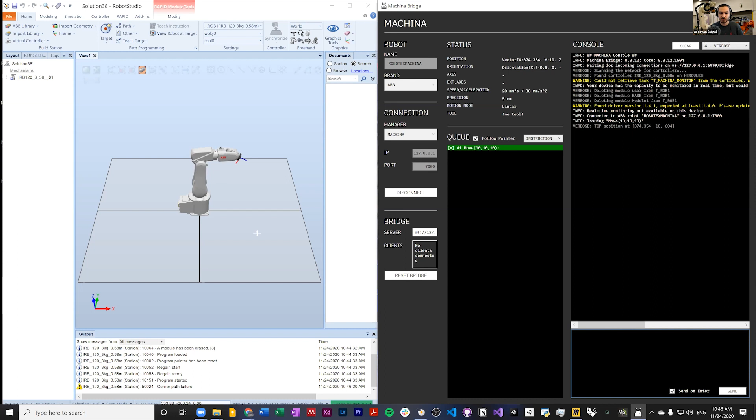That's the beauty of Machina. I can write the command here and it's going to run it. And as soon as I run that command, you will see that this line here becomes green, which means that okay, you gave me this order, I ran this order, and it's done. Go for the next one.

So if you hit up and down arrows on your keyboard, it's going to bring the last commands that you have used. And it's really handy because sometimes you want to repeat a command for multiple times.

It's actually pretty good. I'm going to ask the robot to come back so I will have more space. So I'm just going to ask the robot to move for -10, -10, -10. As soon as I hit enter, it's going to tell me okay, the robot is going to get back into its position. So far, so good.

Everything seems fine. And the point here is the fact that it's not just about moving the robot in a specific direction. There is a library of commands that you can use. It's not going to be as extensive and comprehensive as what you could get, for example, from the core rapid commands, but it's really handy if you want to do something general.

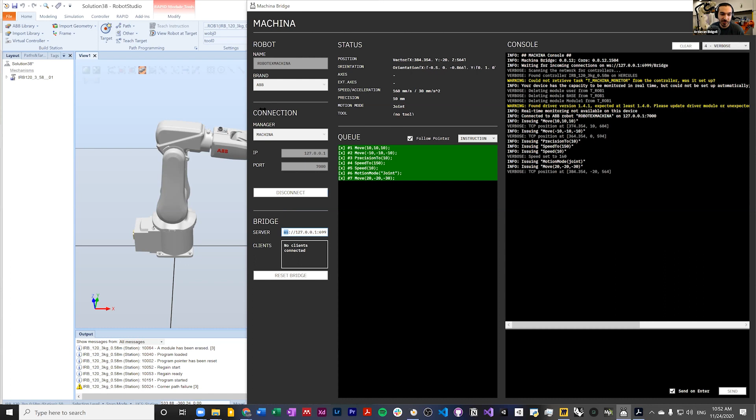So if you get back to your files from RobotStudio, from Canvas, you'll find a folder called Machina. If you don't want to go that direction, there's always this thing called Food4Rhino. Over there you can search for Machina, and it brings you this - there's a plugin that runs Machina by Garcia del Castillo on your Grasshopper.

You can download this file from Canvas also, so at the beginning of class I asked you to do so. If you go to Food4Rhino Machina, you can download the files, which is Machina for Grasshopper. If you do so, it shows you this folder. Open it and unzip it, and there are a couple of files here. You only need these three.

You can select these three files and copy paste them into the component folder of your Grasshopper. Let me copy paste these things onto my desktop. I'm going to make a new folder and call it GS Machina.

You don't need the README file. If you go to your Grasshopper - give me a second until I open this one - it's basically the same method you use to install anything on Grasshopper, with a catch that I'm not sure you should always be concerned about.

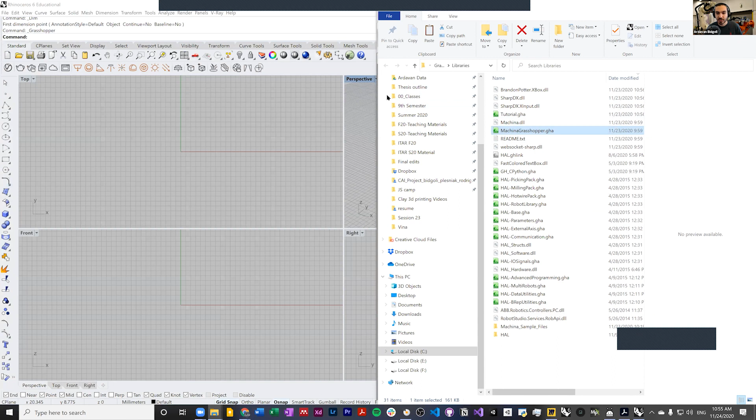Once you do that, and hopefully you had enough time to do it, you can start using Grasshopper and Machina all together. So let's see, where is Machina? For me it doesn't show up here, so I need to... okay, it actually should show up here because I saw it the other day.

So basically here, it does a really interesting job. It has one section that's called bridge. Machina, basically the Grasshopper engine for Machina, almost does the same job as HAL, but with a totally different mindset. If you want to switch from HAL to Machina, there would be a learning curve. You're always welcome to do this, but it's slightly different, and it doesn't have an IK solver and visualizer. That's why we are staying with HAL.

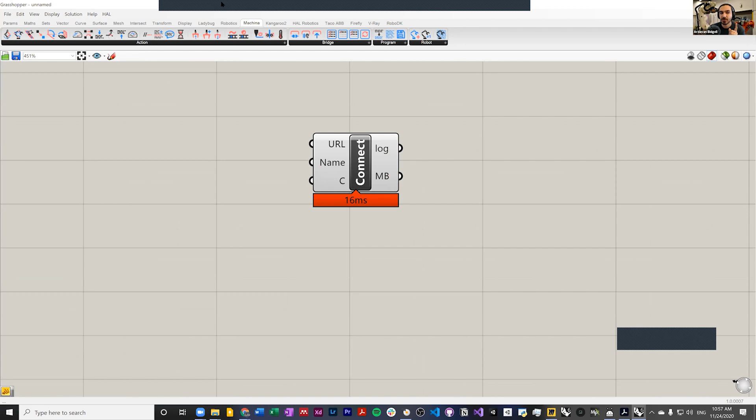Anyway, this bridge section of Machina is the beauty of Machina. I love it. Basically, it says that I can communicate from Grasshopper into your bridge, and from bridge into your RobotStudio or any real robot that you might have connected to it.

Why did I put this one here? Okay, so we have this here. Let's bring up the Machina server. I want to use this connect component to make a connection between my Grasshopper and the bridge on the right side. You can see here it says no client connected, which means this bridge is not connected to anything. But it says this is the address of the server.

I copy this text here. Right click, copy, and I paste it here. I don't hit enter at the end - remember, it's a really bad idea to hit enter after doing this. I'm connecting this one to here, so it knows where to look for in order to connect to.

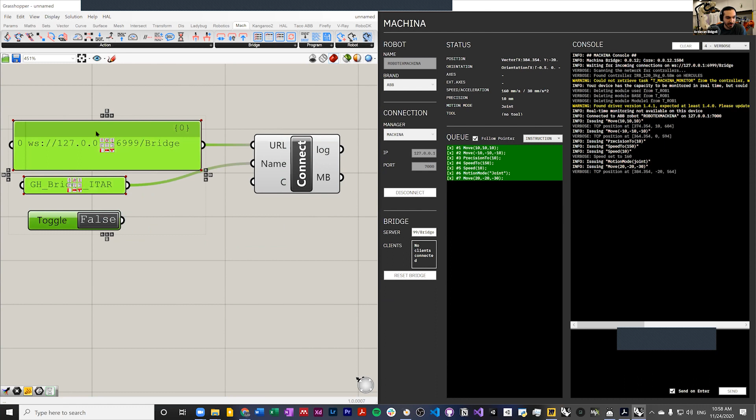I'm going to say that this is Grasshopper Bridge, even ITAR, to make it more complex. So this is the name. I'm going to use a Boolean toggle as a switch here that makes the connection between this Grasshopper thing and the bridge - this is the on and off switch. As soon as I hit this one, you see that it says Grasshopper Bridge ITAR is connected to bridge.

Okay, so we are connected, but what else can we do? The point is we can actually listen to the bridge. This is the component that automatically listens to your bridge and shows you some information about your robot and what's going on, the whole situation. Yeah, this part is good. Everything is fine here.

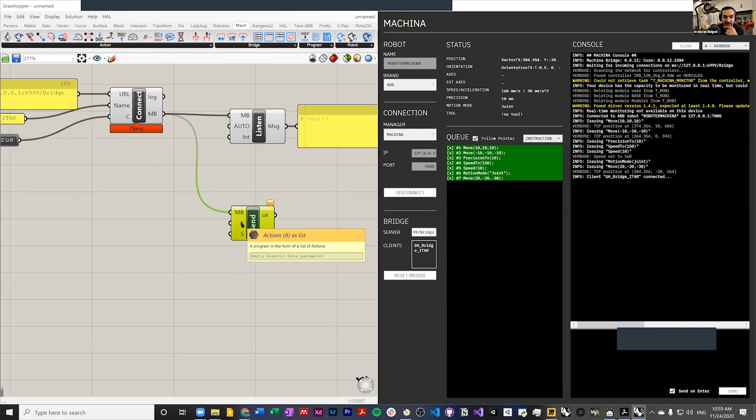This is something that's going to constantly listen to our bridge, but actually the cooler part is to send something to the bridge. This component here is going to connect to this specific bridge, and it's going to send it an action or a list of actions. Actions in the language of Machina is a set of commands - it's equal to the same thing that we had in HAL as motions or commands.

For example, here I can ask it to do some movements, so move from point A to point B. Again, it has an absolute value or a relative action. I just want to ask my robot to move for like 10 centimeters in this direction, 10 in this direction, and 10 in that direction. So basically, I can make a vector, and I want my robot to move for 10 centimeters or millimeters.

Let's say like 25 millimeters in the X direction, maybe the same thing in the Y direction, and a little bit in the Z direction - maybe a little bit further in the Z direction. I want to send this command to my robot. So far so good, it seems that everything is pretty much practical.

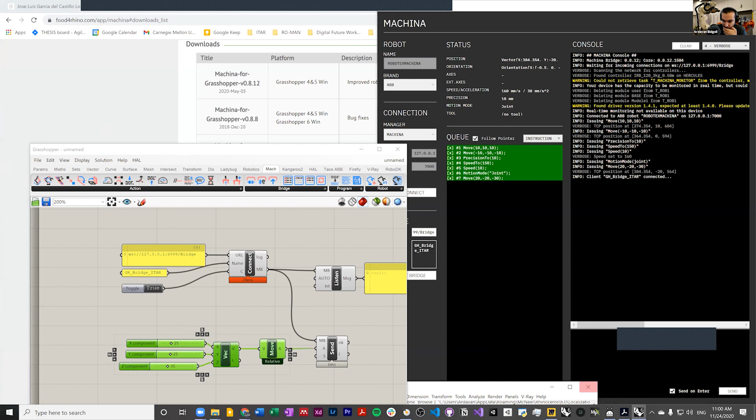Okay, I'm just going to rearrange my screens so we can see what's going on. My RobotStudio is going to be here - I'm going to make it a little bit smaller, probably by just hitting it here. I'm going to keep my Grasshopper down here, and zoom back so you can actually see what's going on. And we have our bridge here.

As you can see, this switch here tells us if we want to send a command to our robot. Beforehand, I used this toggle switch, which basically stays on until we say off, or stays off until we say on. But in this case, we are using this button that only becomes true when we hold it, and becomes false when we release it. So I'm going to use this one.

Okay, let's see what's going on here. So it says nothing has been sent. I hope you can actually read it. And it's going to send me what we are going to send.

As soon as I hit send, the robot is actually listening to me here and goes in that direction. Actually, I want to flip that vector, maybe multiply it by -1, because I want the robot to come back at this moment since I don't want to move it too much in that direction. So I'm going to say -1.

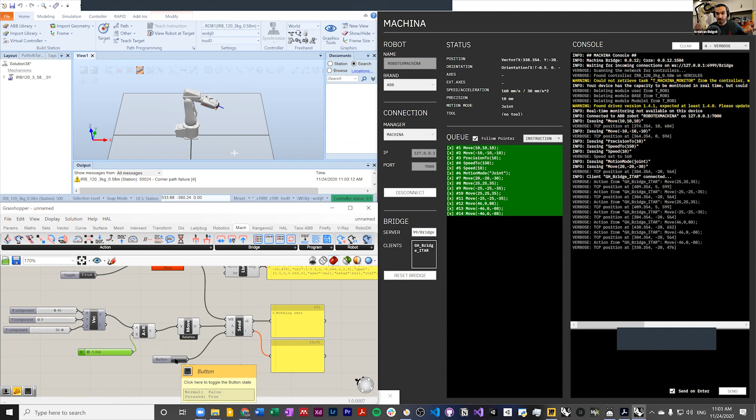It's exactly what will happen if you do the same thing with the real robot. If you connect your computer through an Ethernet cable to the controller of one of these robots, it doesn't matter which robot it is, it's going to do the job.

And everything gets a little bit funnier if you start using this, which is basically an Xbox controller. Oh, you cannot see it - an Xbox controller. And if you don't know, there's actually a plugin for this to work with Grasshopper.

And the plugin is in your Canvas folder. I think this thing is going to work. It says my Xbox controller is connected. I'm so mad that it's not showing it correctly.

And it reads exactly what's going on with all of my switches and buttons on this Xbox controller. So you see that the number is right now 50. It should be, okay, left thumbstick, X. It should read this one.

So let me just put a timer here, so it's going to read the value from my controller. Come on. Okay, and the interval should be set to like 100. Yeah, you can see that when I'm moving this left and right, it reads between -50, between 0 and 100.

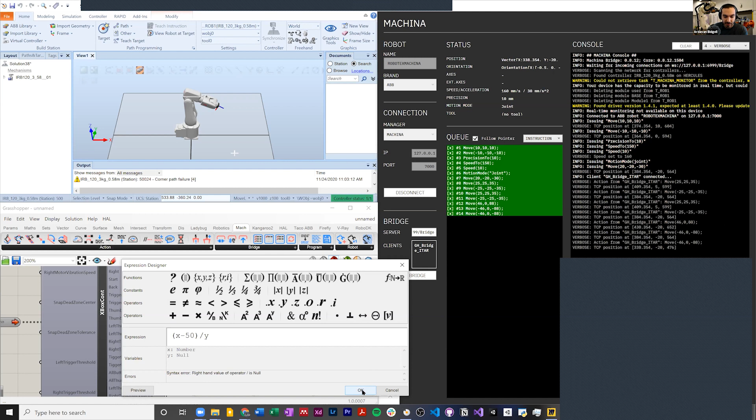So whenever I'm not holding this switch, it's going to be 0. Whenever I'm moving left, it's going to be -50. Whenever I'm moving it to the right, it's going to be +50. And Y is the factor that I can divide everything by, because 50 is actually too much. So yeah, I have this number here.

I can do the same thing with the up and down arrow. So whenever I'm holding my Xbox controller and start playing with it, you see that when I'm changing the numbers, like when I'm moving left and right, it goes with this number, -20, +20, actually the other way around. And when I'm moving up and down, it gets these numbers.

I can actually go for a bigger scale factor, because maybe something like 10 would be better. Now, every time I'm sending the command, it's just going to move for a couple of millimeters. And then I can grab these things.

And I can connect them to this XY thing. And instead of sending the commands one by one, like what you see here, I can actually get a little bit further. So let's go for a little bit further. The robot goes up. Oops. And maybe the robot should actually come down for a bit.

Okay, good. I'm going to remove the Z value. And instead of having this switch here, I'm going to put a button here, a toggle here.

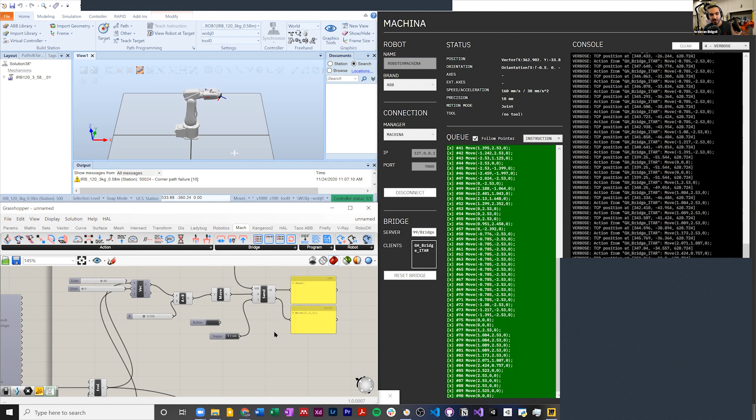Now everything gets crazy. When I'm playing with this, the robot is actually replying to my commands. No problem, you see that? I'm just playing with my Xbox controller and the robot responds.

This is a really interesting property we can get. Based on the amount that I'm playing with this joystick, it's sending different values to the robot. I think right now I'm getting too close to the body of the robot, I need to go a little bit further.

But you can actually work with anything. This is an Xbox controller, but you can go for anything else. Maybe if you're a hacker, you can connect it to your Apple Watch and it's going to track your hand gestures.

If you're so fancy, which is something we are going to be in the next couple of weeks after the break, we are going to integrate some machine learning algorithms to, for example, track your hand gestures and do something for you. Or we can do whatever we want.

For example, we can use an image classifier to distinguish between a cup and a mouse, and then it's going to guide the robot to pick one of them, which was a huge problem like 10 years ago, but right now it's at your disposal and you can actually work with it.

And it all comes down to this open source software that we can work with. So there are lots of potentials in this Machina, Rhino, RobotStudio, Grasshopper, real robot interaction that we are going to investigate a little bit further in the weeks after the break.

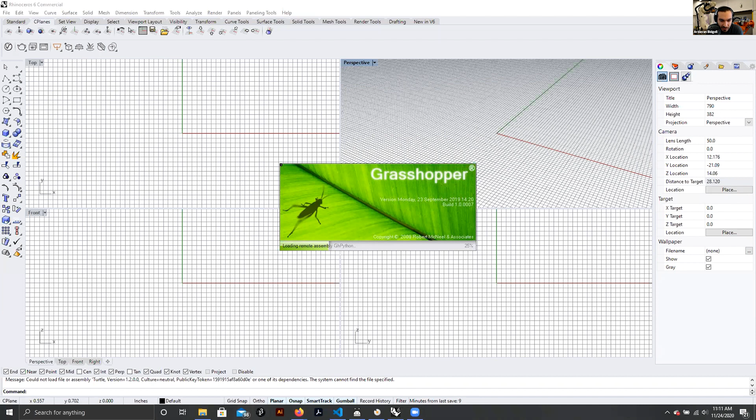That's a little bit odd. Okay, so it happens every time you try to open it. Oh wait a second, so you have Rhino 6 and you have Grasshopper build 1.0.0007. Did you, okay, can you put that Machina component again?

Let me see, can you reproduce the same error? Oh, you want me to close it out again? No, just, so it doesn't load the Machina at all? No. Did you unblock the Machina objects? I did.

Okay, can you just send me a screenshot of that one? I'm going to send it to Jose Luis and see if he can actually find a solution for it. Okay, because he's probably already seen this. He has already seen this one. Okay great, so hopefully we can solve that problem before the next session and everything goes well on that side.